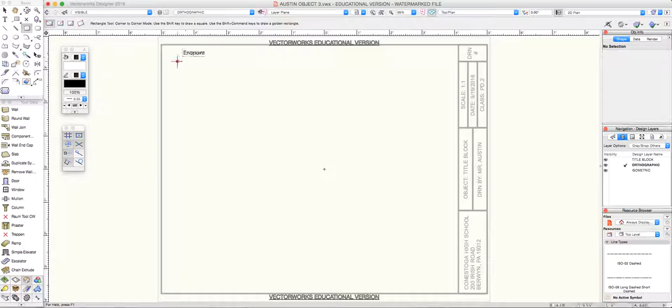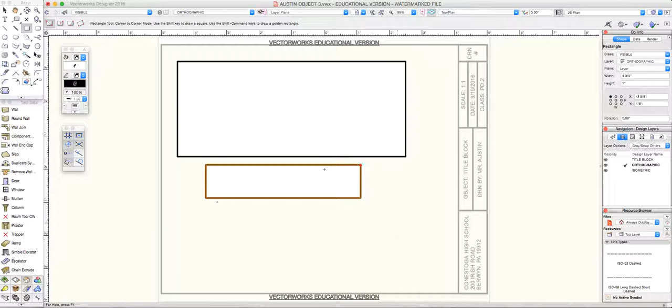So we've got a 7" by 2 7/8. So I'm just going to go ahead and draw a 7" by 2 7/8. You can already see that this thing is massive, right? So the second rectangle I'm going to make is a 4 3/4 by 1" piece. And I know that this piece is centered on that piece, so I can go ahead and center that.

From here, I'm also going to take my line. I'm going to make a center line, or I'm sorry, hidden line. And my hidden line can come right here. It's right here. And right here. So I just did that by clicking on that smart point and allowing that to click down into the outside of my object. So you can see that this thing is going to be pretty big.

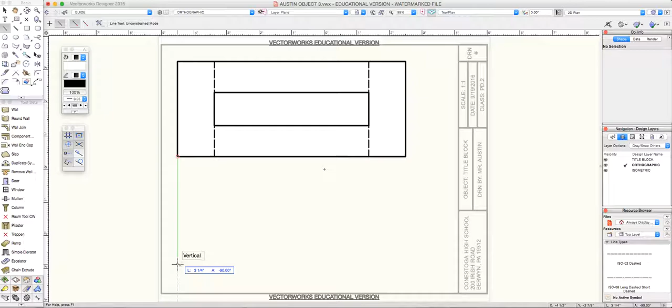So my suggestion at this point is for us not to care how big this is and actually just continue to draw with it being larger than our title block. And what we'll do is we'll come back and view this object in a different way in another series about how to scale some things.

But what we have here in the front is, I'm going to draw this in my guide class first to make sure I have it correct, and starting in that lower corner, I'm going to come up 1½ inches. I'm going to come over. I'm going to come up 3/4 of an inch. And then I know that that's going to come straight over here.

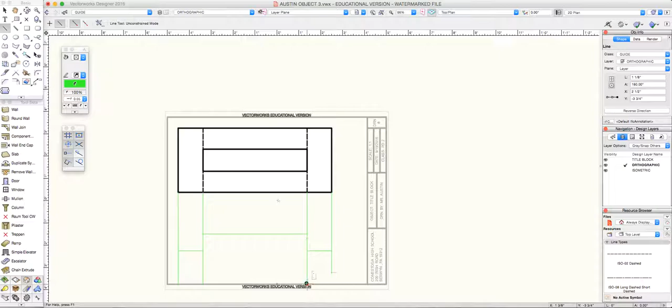I'm going to hold down my shift key. I can bring this line from here to here. I can bring this line from here to here. I can bring this line from here to here. And then what I need to do is come in to this point here, coming up 3/4 of an inch, which I have not done yet, coming straight across. And now what I have is the basic outline for my object.

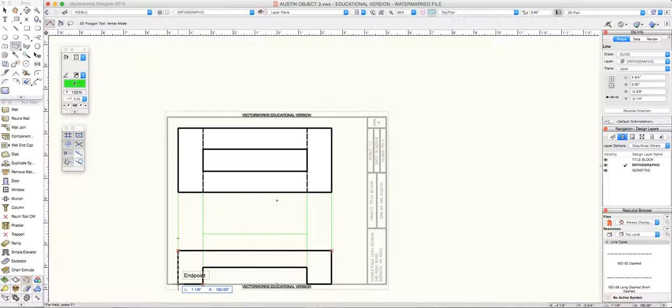So what I'm going to do here is, I know that this line continues straight across. I now have a basis for what everything's going to be, and I'm going to make my 2D polygon in the visible class. I'm going to make that right here. I'm going to start in this corner and go all the way over to the side, down, over, up, over, down, and back. So I just created that bottom section of that object in the visible class.

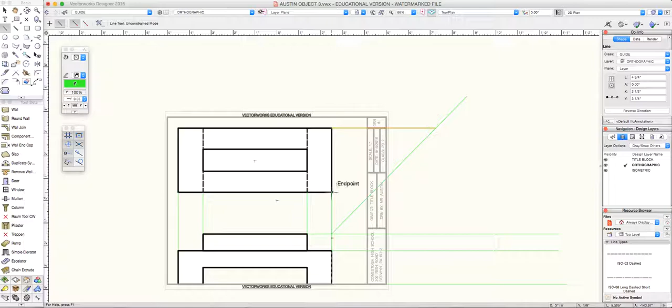I'm going to create a rectangle on the top also in the visible class, and from here I can now go onto my guide class and create my object in the right view. And I'm going to take this as a 45-degree angle and bring this object over as well. I think the only thing that makes this one kind of difficult, honestly, is this is the first time that we're needing to use the guide class to make some of the visible items previous to making the overall object.

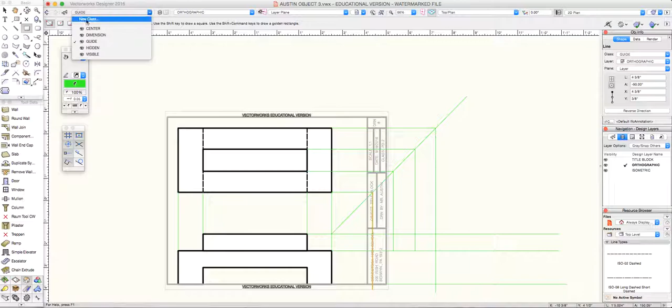So now I'm going to go back to my visible class. I'm going to draw my lower rectangle. I'm going to draw my upper rectangle. And I'm going to bring in my hidden line. So changing to the hidden class, bringing this line over. It helps if I actually start in the right spot there.

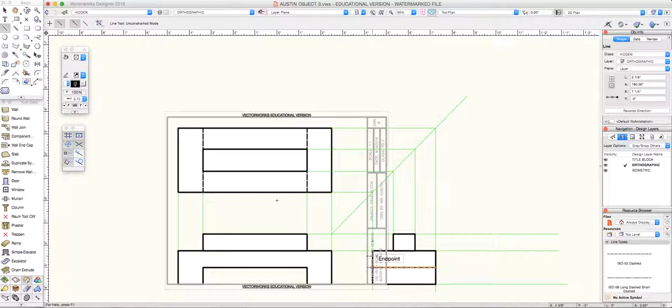I have my hidden class here, and that's going to pretty much take us to going back up to View, Class Options, Active Only, going down to the Guide class, selecting all of my guide class and deleting it, going back up to View, Class Options, down to Show, Snap, Modify, Others, and there is Object 3.